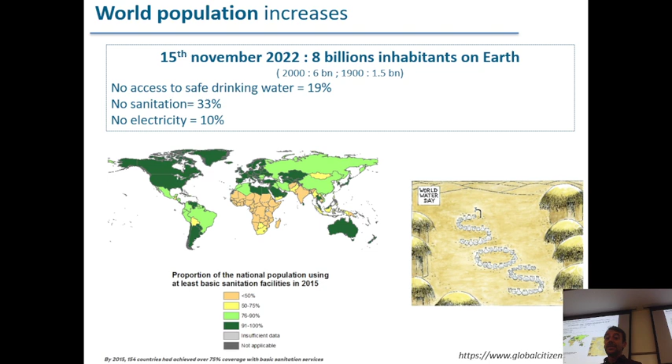And on this map, you see that there are some places not far from the equator, mainly in Africa and India, where there is a lot of trouble related to sanitation access. The goal is that those populations without sanitation decrease in number, and the consequence is that we will need more water, in places where there isn't too much water.

So yeah, the global population of the world is growing. We are talking about 10 billion by 2055, and at the same time, we increase the needs for water.

And I found this interesting data relating to worldwide water consumption every day. If we see it in cubic meters per day, nobody could imagine what that means, but it represents around 50 Olympic swimming pools per second of consumption all over the world. And this consumption is growing. The UN says that by 2050, worldwide water consumption will grow by 20-30%. And the main consequence is that more and more people will suffer from water shortage or no access to water.

So that's the trouble, and we have to find some solutions for that. But the trouble is not only linked to world population growth, and not only linked to the fact that we need more water to feed that population - it's also linked to climate change.

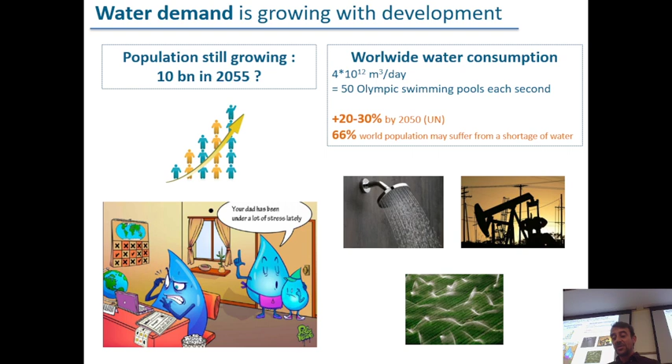And I found this data also, which is interesting. The one on the bottom is from Australia - it's the stream flow of Western Australia rivers. Even if we are not convinced about climate change, this data shows it clearly. The timeline starts from the early 1900s, and right now we are around here, and you see quite clearly that there is less and less stream flow in that part of the world, and there is not only less water from the sky, but there are also other phenomena.

Like drought, like flood related to water - comparing the 20 years before 2000 and the 20 years after, you see there is an increase. So all these increases in droughts, floods, and storms could also affect access to water.

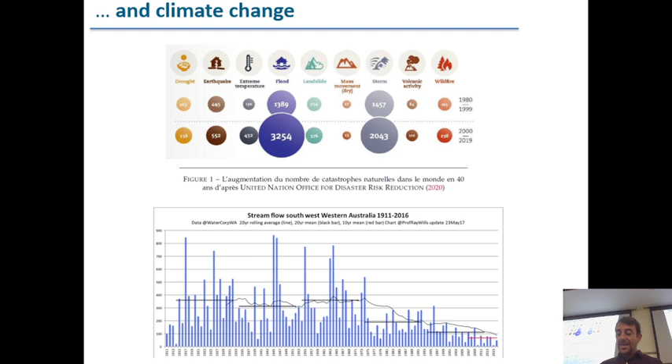And just a little focus on what's going on in France, because in France everybody was quite shocked about what happened last year and what is now happening in 2023.

Last year the drought was really, really severe during the summer, and we got some plan of alert or crisis when there is some water shortage in some place of France. This map shows France, with Montpellier here and Paris there, and the colors are linked to the level of the water crisis.

Last summer, on the 26th of August, almost all of France was in water crisis. Except for a little bit of Brittany, all French departments were under water restrictions, so around 97% of French territory was affected. As a consequence, more than 100 municipalities had no more tap water during the summer, so they were obliged to distribute water in bottles.

That was really shocking for people, because I remember 10 years ago when I was teaching about wastewater treatment to my students, I was saying maybe later there will be some water trouble in France, but right now it's not the case because we have a lot of mountains, rivers, and surface water, so no worry. But that was the situation in 2022.

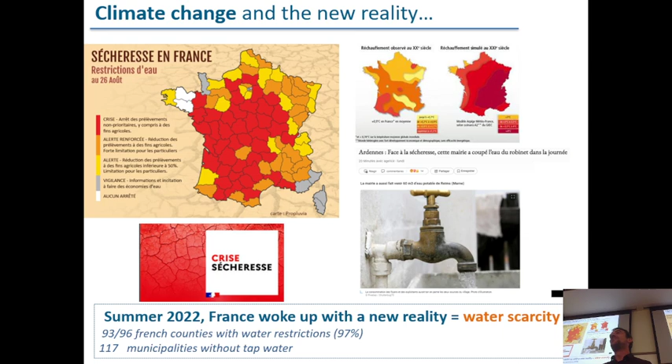But that was just the situation, and now I will try to be more optimistic or more positive by showing you some possible solutions for those problems.

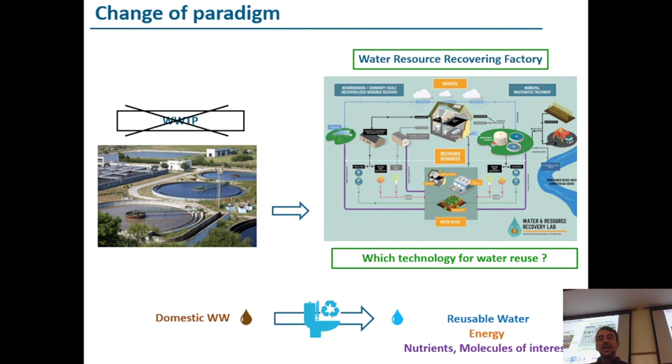I'd like to introduce this topic with some trending themes. These are trending topics you may have heard about in other situations, but we want to decrease the energy demand of all our systems, because there is also an energy crisis in Europe related to geopolitical issues. We want to limit climate change, or human impact on climate change through greenhouse gases. So greenhouse gas issues are also of interest for the development of new wastewater treatment plants.

In some cases, we want to decrease the extraction of natural water from the place where we are, so we want to close the water cycle in a circular economy mode. Some industries want to avoid paying for water and avoid discharging water for treatment, so they want to close the water cycle inside the industry - sometimes we call this zero liquid discharge.

Recovering molecules of interest - waste could also be something you can sell afterward. So it could be interesting to get something valuable from the waste.

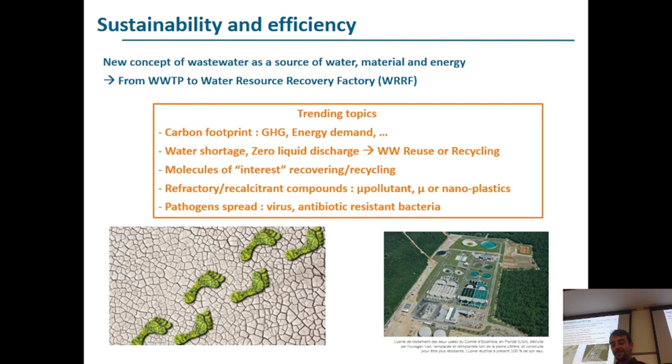So try to organize these different ideas into four topics: water, energy, environment, and feed with nutrients we can recover. I will go a bit further into each of these topics and the main information related to them.

Water: we talk about non-conventional water resources. What does that mean? Conventional water resources are surface water, groundwater - maybe seawater could also be considered non-conventional - but used or treated wastewater is a non-conventional water resource.

What's also interesting is fitting the water quality for the purpose - you can match the quality to the intended use, and this is really important. When I was studying wastewater treatment, we talked about regulations for discharging water into the environment, but there wasn't much difference across locations in France - we just had to meet the regulations.

But for water reuse, this is not the case. It depends on what you want to do with the water, and it also depends on where you are, because if you're in a coastal area versus inland, it's not the same situation.

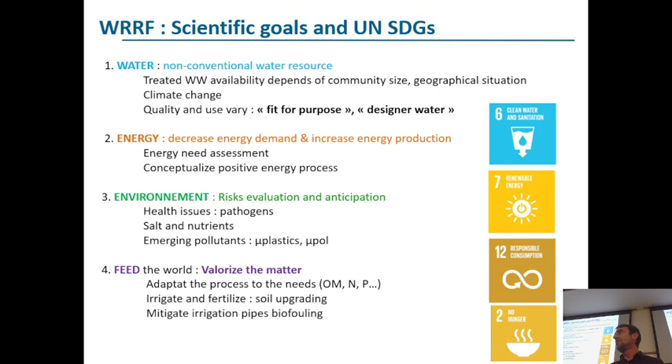So, irrigate means giving water, and fertilize means giving nutrients. There are also issues related to the fact that when you irrigate with something other than tap or drinking water, you may have more organic matter, more nutrients, and there could be development of bacteria inside the irrigation pipes. Those bacteria could be pathogens, and there could also be biofouling of the irrigation pipes. So there's also a topic related to that.

About a month ago, I was at a conference, and some people from Spain showed this really interesting concept, the history of water. My talk right now is more dedicated to water, and I thought it would be quite interesting to introduce this concept of water 5.0.

The Roman system is known to be one of the first systems of using water in a place where a lot of population gathered, but it was not the only system. There was also the Mayan system in Mexico and other places where ancient civilizations used and tried to manage water.

It was quite a basic system. They wanted to bring water to the population and thought it was better to discharge it far from the city, so they started to construct pipes. If you visit places in Italy, like Pompeii, near Napoli, you'll see ancient Roman cities where along the streets they prepared channels for the wastewater, because wastewater was discharged into the streets. But they didn't want the wastewater to stay in front of their homes, so there were channels, not really pipes, to carry it away.

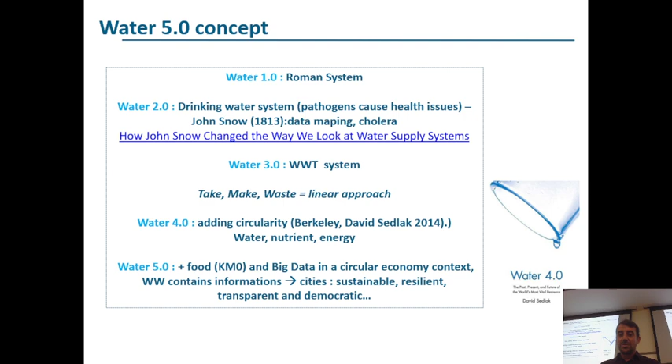In this concept, there's also the fact that wastewater contains a lot of information about the habits of people. So with wastewater analysis, you can know if COVID-19 is present in a place or not, or if it will spread, or you can also know the habits of drug consumption and everything. This information that was in the wastewater is now able to be computed, assessed, and used to imagine what's going on in the city and what the future could be. Okay, so if you are interested, type Water 5.0 into Google and you will have more information related to that.

So I'm coming back to the basics of water. What is wastewater? Wastewater can come from different origins. We are mostly thinking about domestic wastewater, but there's also industrial wastewater, which is really specific. It depends also on the sewage network, whether it's unitary or separative, and what is the lifetime of water in the pipes, the wastewater pipes.

It's really important, what's going on when there is heavy rain in some place. If it's separative, no problem. If it's unitary, it could cause some trouble for the wastewater treatment plant.

And we define pollution with those 6 characteristics. Two are dedicated to organics, so chemical oxygen demand and biological oxygen demand. There is also the content of nitrogen, phosphorus, suspended solids, and the volume of water that we produce.

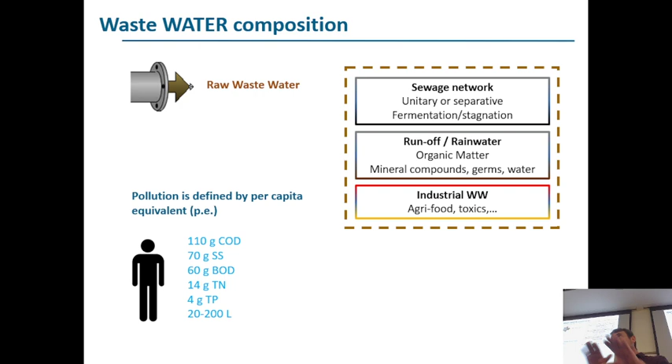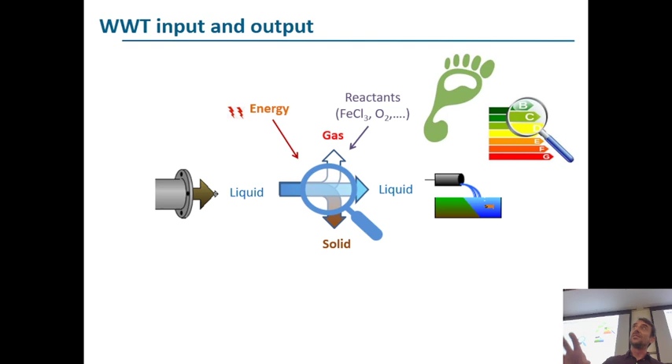So we define, and when we do sizing of wastewater treatment plants, in France we use exactly this data, but it could change a little bit all around the world. So what we do in a conventional wastewater treatment plant: we get mainly wastewater as liquid, and the goal of the wastewater treatment plant is to discharge a maximum of liquid without the pollution parameters, without organics, without nitrogen, without phosphorus, to convert the pollution into a solid that goes to a specific line. There are also byproducts linked to gas, so we produce CO2, we produce N2O, and we use energy and reactants, oxygen to supply the biological reactor, and coagulants if you apply coagulation. This is mainly the input and output of a conventional wastewater treatment plant.

And the goal, the initial goal in France, was to be below those concentrations. This is the regulation in France. I'm not sure about the regulation where you are, but I'm pretty sure it's really not far from that. There are two columns: a maximum concentration allowed to discharge, and a minimum yield of removal. And if we look at the three parameters - biological oxygen demand for organics, nitrogen, and phosphorus -

mainly a part of those three pollution parameters are transformed into solids with new bacteria. Bacteria consume the dissolved compounds and produce new bacteria. When they produce new bacteria, they take a part of those compounds, but it's quite a small part. The other part goes into gas byproducts, so CO2 for the organics, and N2 during nitrogen removal by nitrification, denitrification.

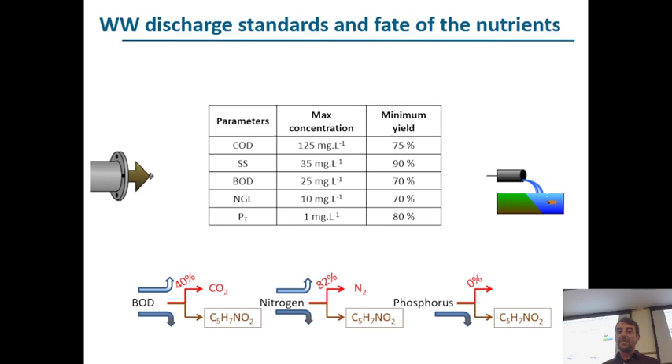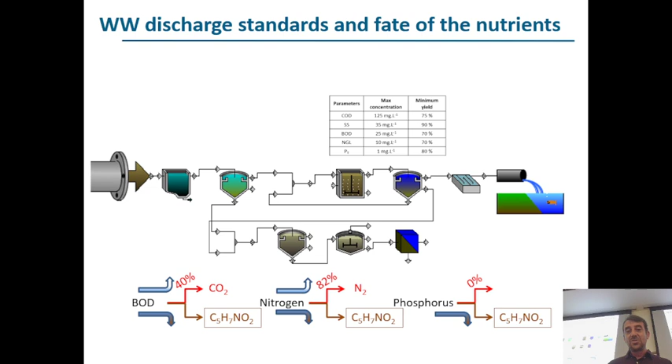And so to reach those standard goals, we use different unit operations. Some who are doing chemical or environmental engineering for wastewater treatment plants could recognize the different unit operations we get there. We've got the biological tank, the settling tank, could have also disinfection that happens sometimes, and here is the sludge line for the sludge. Okay, so this was the picture of the conventional treatment.

And so what we can get from all this wastewater - as I told you before, I want everything to be really clear for you. Remember this: wastewater is 99.8% water. So as a scientist, you should know, and you should spread this to everyone, that it's mainly water. So when there is a human, there is some water somewhere, okay? It's really important to keep this in mind. And then you've got all the organic matter, nutrients, and badly, we also get micropollutants.

So from water, what we can get is water to recycle into the wastewater treatment plant, because it uses water too, or to reuse for different applications. We will go a little bit into this water reuse later.

We can also get some thermic and hydraulic energy. Maybe something interesting I heard is that in Paris, France, the Élysée is a place where the president is living and working, and they use wastewater from Paris pipes to heat this place. So the thermic energy from the wastewater, because it's warmer than the outside, is used to heat the Élysée Palais in Paris. So there is some energy in this - it could be hydraulic if we use different elevation, or thermic.

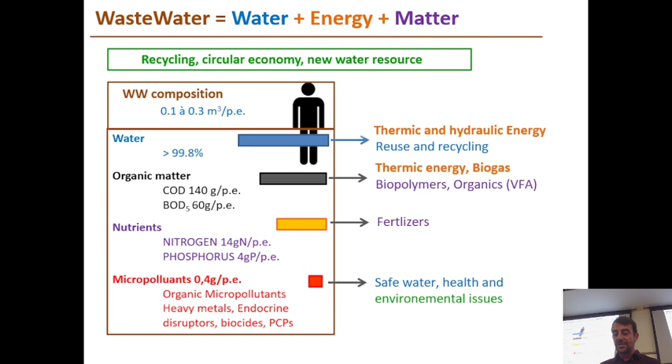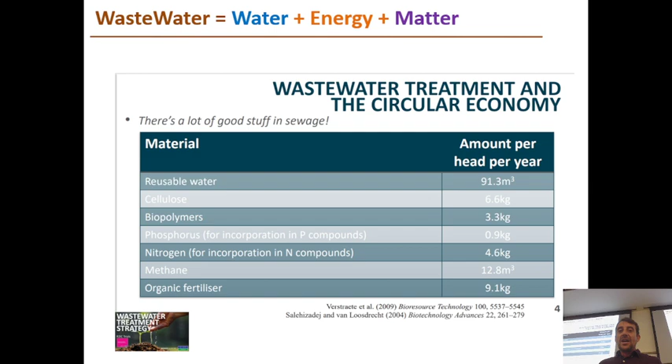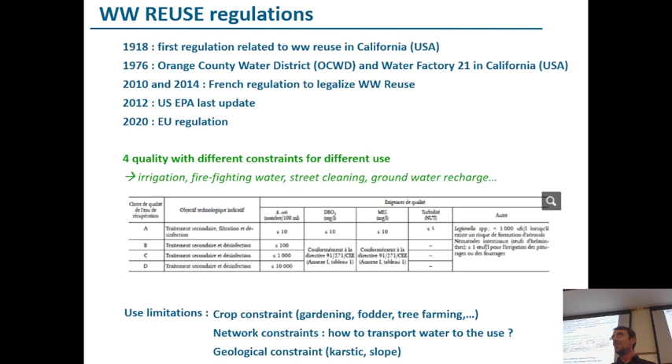So maybe in a decentralized way of thinking about a city's wastewater reuse, in a flat or building, it's maybe more adapted. But for the centralized system with a big wastewater treatment plant, we can produce good quality water for reuse, but how to transport it to the people who need it? Not so easy. So there are some issues, and maybe civil engineers are involved in those issues too.

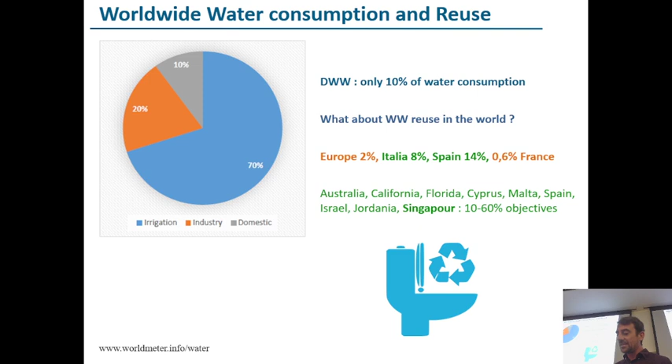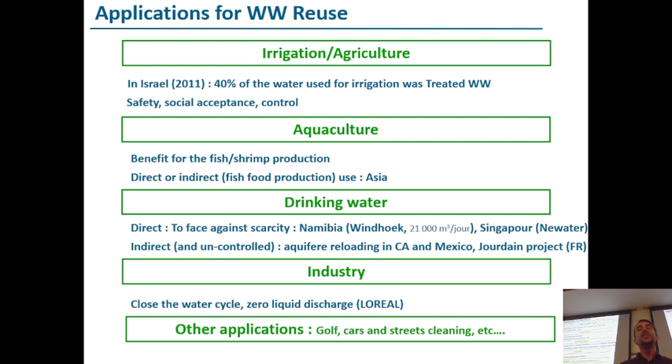It's a possibility. They were not so clear when I was discussing with them, but it's quite interesting to see that. Okay, so yeah, if we want to spend some time for discussion, I have to go really quick, so maybe I will shorten a little bit. I wanted just to make a focus on this drinking water production in Singapore with wastewater.

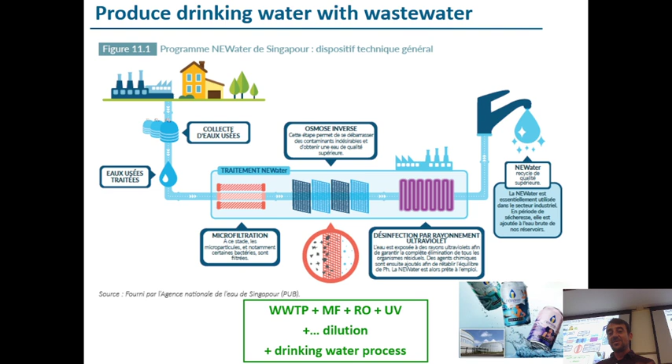So I think that at the end we can be sure that there is no matter of trouble with this kind of system, but maybe we could make it a little bit more simple. Well, I think I will finish with that. We'll let the last part dedicated to energy.

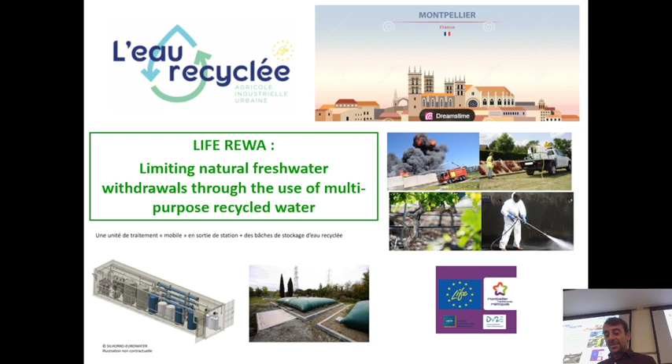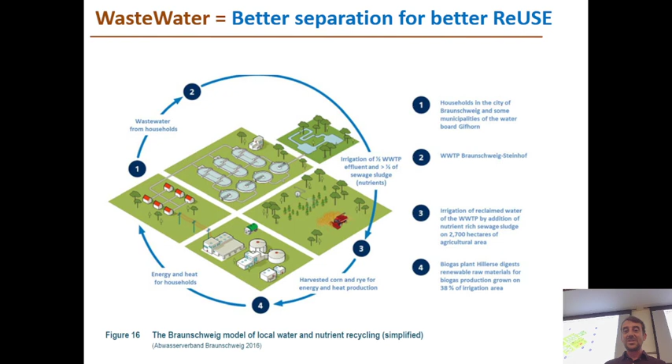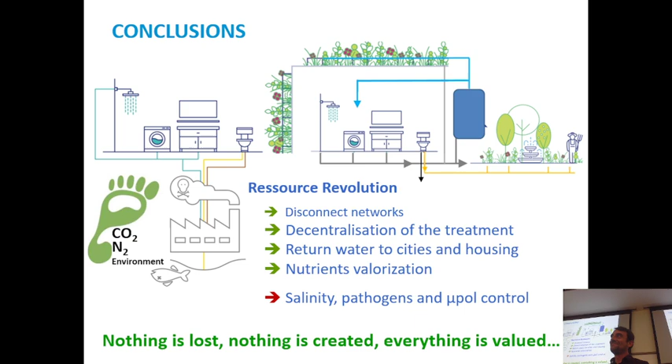How do you have disconnected networks here? Do you ever do studies with just gray water versus black water? Because that's something I actually just wrote about for a paper in Dr. Snow's class, was gray water treatment reuse. And so I know there's a lot of difference in the total organic carbon available, or present, in black water versus gray water.

Okay, yeah, I didn't have enough time, I discussed too much, but I will share my slides with Dr. Snow, and we can have the discussion later. But yeah, that was part of my goal, was also to talk about this source separation. I think it's a really hot topic, and it's something really interesting because we are talking about grey water.

For example, in my home, I'm using grey water for direct irrigation in my garden because I know there is no concern for my plants. I can grow my tomatoes with the water from my kitchen. There's no problem, and at this scale, it's okay.

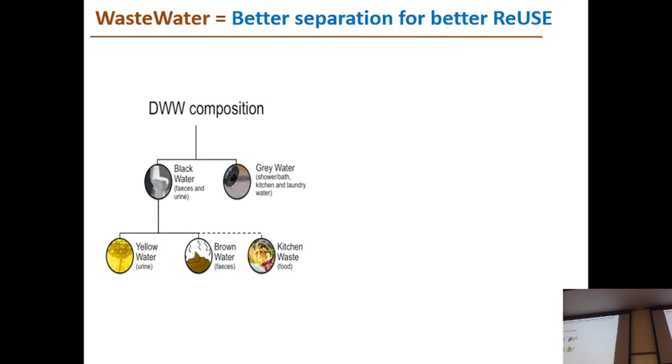There is also direct urine use for fertilization, which is also really interesting, because in urine you've got... I wanted to show you this. You see, in urine you've got like 90% of the nitrogen that you can find in the wastewater. So if you want to do fertilization, you separate urine.

It exists, I don't know if you have examples in your course. There are some source separation toilets, and they are also building some. I saw some buildings in Switzerland where they do this. In the basement you've got the grey lines through the pipes, you've got the black water, you've got the yellow water. They use it directly.

I think it's a really interesting topic, source separation, and also we are talking about micropollutants. If you avoid discharging pharmaceuticals into the wastewater, it gives you also a nice idea. Some parts are difficult to separate, but that's a topic. Thank you for the question.

What is the main challenge to convince people to use wastewater as drinking water, do you think? Sorry, I didn't get it. What is the main challenge to convince people to use that wastewater as drinking water? To convince the people, because people are not...